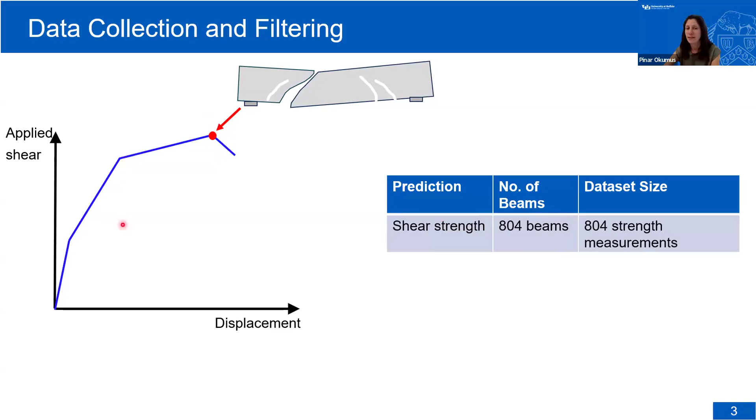At that point, your cracks are already very large. We're not worried about cracking. But you'll see that we use this prediction to benchmark our applied shear predictions and the total response.

The second algorithm we developed is for applied shear. Applied shear is all these points that correspond to measured crack widths. And if you look at the literature, only actually out of the 804, only 79 beams reported crack widths and shear measurements. But luckily for each beam, you have multiple crack points like this, and multiple load measurements. So we have 409 crack width versus shear measurements for applied shear that we can train, and that's the sufficient number actually for the algorithm that we picked.

We take this applied shear and normalize it by the shear strength. That's why we need this shear strength parameter, so that it gives you a better idea of the bridge condition, because saying your bridge was loaded to 100 kips may not be meaningful, but if you say your bridge was loaded to 80% of its capacity when you saw that crack, it is meaningful information that you could use to say, okay, that bridge is going to be prioritized before another bridge that may have been loaded to 30% of its capacity.

And then finally, the last algorithm predicts stiffness. For stiffness, there's actually even fewer beams, so only 37 beams in the literature, and 254 crack width versus stiffness measurements, because again, for each beam you have multiple crack measurements. So this 254 is on the lower end of data size for machine learning, but we worked with what we have. And stiffness, similar to applied shear, we normalize it by the initial stiffness, so this portion of that load displacement curve.

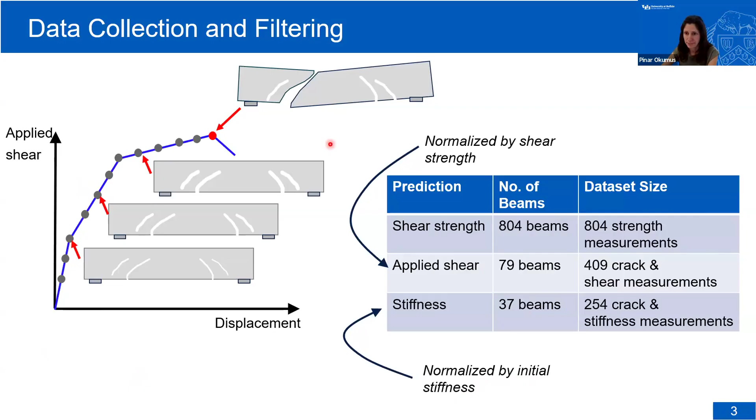So I'm going to jump into the results directly for this part. These are our machine learning predictions. We're using something called Gaussian process regression. These plots you'll see a lot in this presentation. Vertical axis is the test results, horizontal axis is machine learning predictions. And if you see any dots on this red 45-degree line, that means it's a perfect prediction, we're spot on. As you can see, our machine learning does a pretty good job predicting the strength, and the large coefficient of variation comes from these outliers. The other advantage of the method that we picked is that it can also give you a variance, which is an indicator of how certain the predictions are.

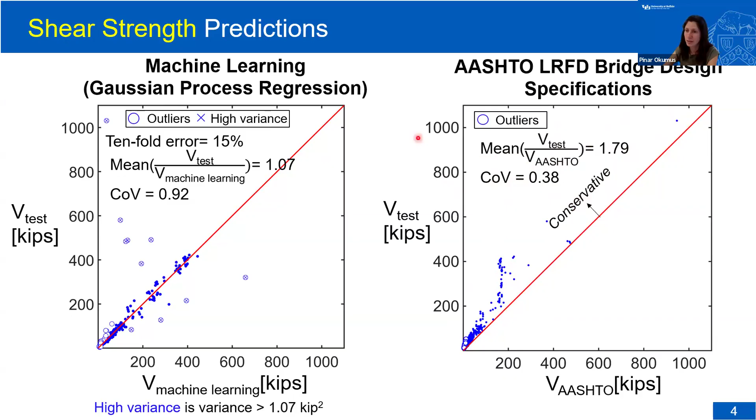If you wanted to compare that to how well design codes predict the capacity, this is one example. So this is AASHTO LRFD. You can see their mean of the ratio test divided by AASHTO is much larger. That doesn't necessarily mean that they're worse, they're trying to be conservative, that's the intent of the design codes. That's why all the dots are on the upper half of the plot. But it is an advantage to not have that conservatism in evaluation, because what's really valuable for new bridge design may not be needed for evaluation. And that's what our machine learning does.

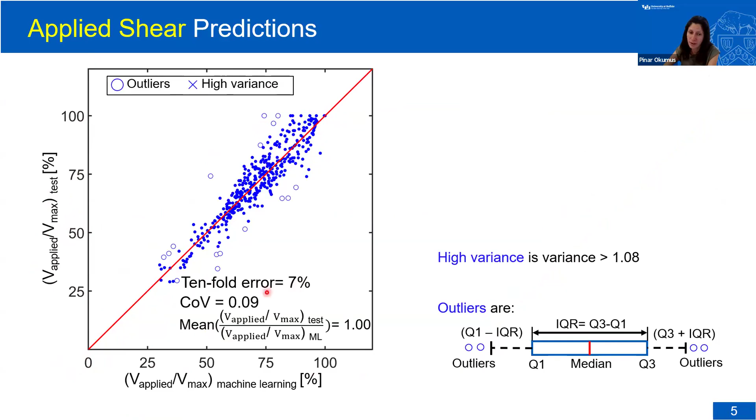For applied shear, again, same type of plot. So this is that applied shear corresponding to a crack, normalized by shear strength. Horizontal axis is machine learning. We have pretty good predictions, really good error, and a really nice coefficient of variation.

And then finally, from what you've seen before, we know that not all bridge engineers out there are going to want to run algorithms. So we developed this web interface where the bridge engineer or an inspector populates it with the bridge design features and the crack width, and then it tells them the percentage of the bridge capacity that the bridge experienced, so 67 here, and 51% of the stiffness the bridge experienced when there was that crack. And again, the variance is that indication for uncertainty.

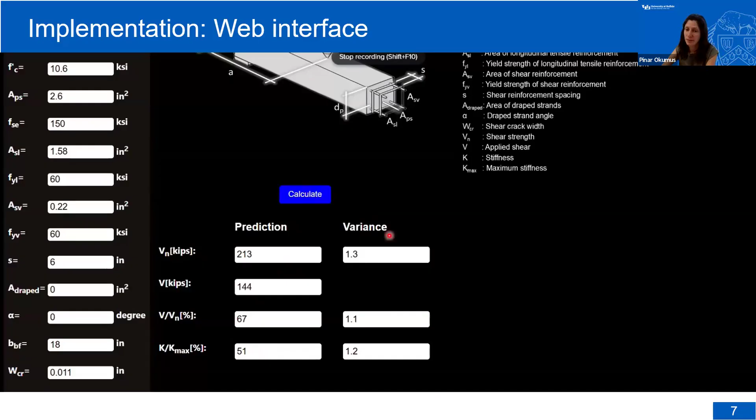All right, so the main part of this presentation is on the beam test that we recently conducted. And the reason why we wanted to test the beam was that we wanted to really understand cracked beam behavior.

If you look at the literature, we have hundreds of tests, but almost all of those tests are loading the beam monotonically under monotonically increased loading. Our test loaded the beam to cracking, unloaded, and then loaded it again. So we conducted cyclic loading testing.

So now we're saying, okay, if an overloaded vehicle passes through the bridge and it cracks, what will happen to that bridge when it's loaded again? We can understand that from our test.

That also gives us an ability to evaluate the capacity predictions of design codes and our algorithms compared to test data. It allows us to assess our applied shear and stiffness predictions, and you'll see that we use some of the new data to enhance some of our predictions.

But first, I'll start with just telling you about the test results and how the design codes and machine learning predicted the capacity.

So this was our beam specimen. We tested a 30-inch deep Pennsylvania standard section. If you're not familiar with it, that's similar to an AASHTO type I section beam.

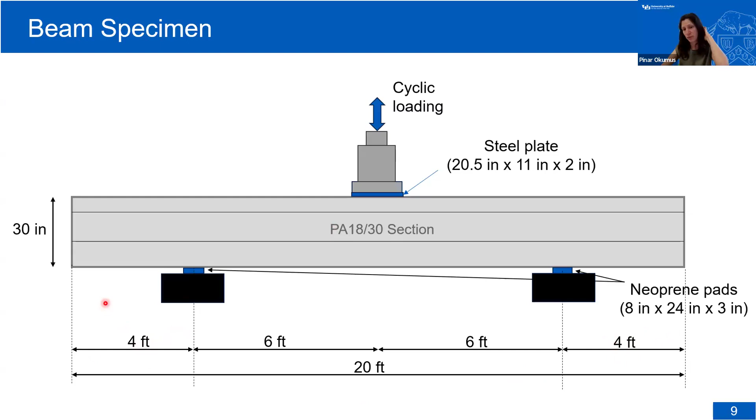It's 20 foot long. We have a 4 foot overhang on each side because we did not want the transfer length to interfere with our results. And like I said, we're doing cyclic loading.

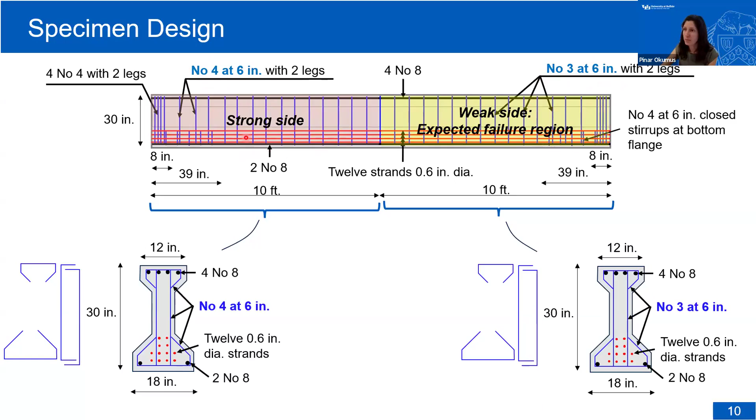On the left-hand side of the beam, we have number 4 bars at 6 inches. We call it the strong side. We know we're not going to be able to fail the beam on the strong side, so we won't be able to get the capacity, but that doesn't mean we cannot collect crack width versus applied load data. So that's what we're getting from the other side.

Our loading protocol, like I said, was cyclic. The other thing I want to make clear here is this is the beam displacement versus time, our loading protocol. So we load, unload, load, unload, load, unload.

One very important thing we can get from this type of testing is that we collect data when we load the beam, and that's your transient crack width. We measure the transient crack width when there's a load on the beam, because this is what all the literature is reporting, since they're running monotonically increasing loading tests. So all the crack data that we have in the literature is really for transient cracking.

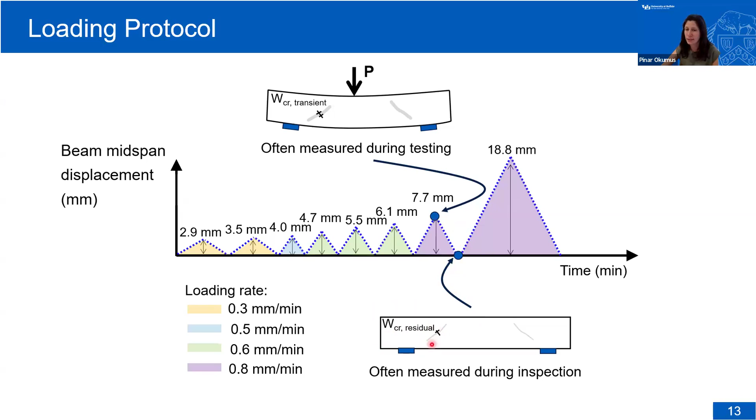But nobody reports residual crack width. Residual is after you remove the load, what's that remaining crack? And it's important because that is what's measured during inspection. Again, there's no data that links the two crack widths together. So we wanted to get a sense of that.

Okay, so before we did any testing, we predicted the capacity using various methods. Our machine learning told us that the beam was going to fail at 550 kips, and all the design codes were much, much lower. You can see AASHTO is actually almost half of it.

We also ran finite element analysis on this one, and that's this result. So finite element analysis was in between the machine learning prediction and the AASHTO prediction.

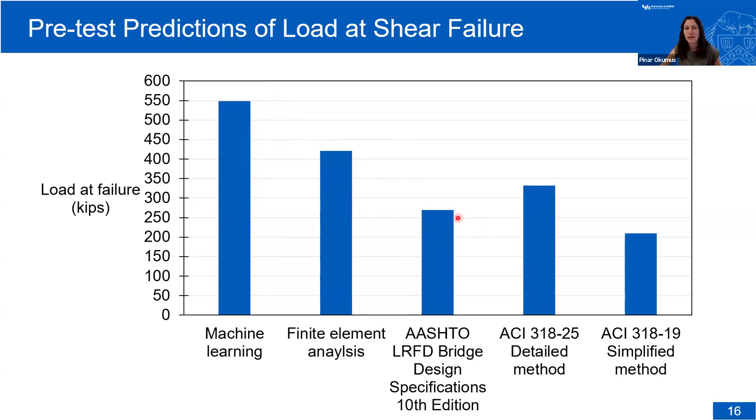And then we tested. So here's our test load and displacement response. We have the actuator force versus displacement. You can see we loaded the first cycle. At the end of the first cycle, we actually did crack the beam already in flexure and shear. We unload, and every cycle that follows, you can see that the initial stiffness is smaller.

And then we had stirrups yielding, and at 450 kips we take it as our failure load. We start seeing the plateau. We started seeing and hearing cracks falling, and we did not want things to get unstable any further, so we stopped the test here. It may have gone maybe another 20 kips or so higher, but we take this as our failure load.

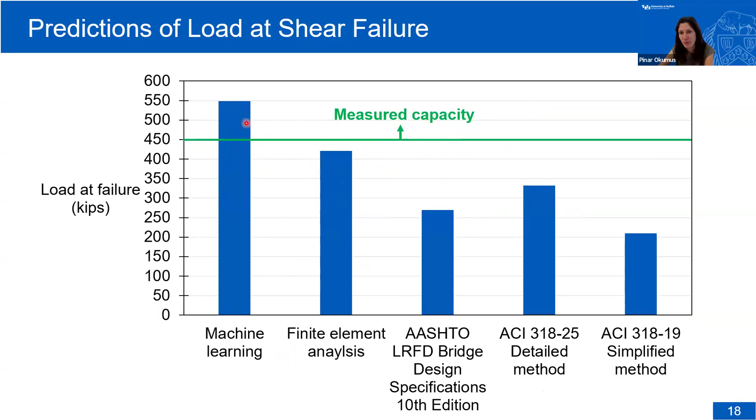So if I plot that measured capacity on my plot, this is how it compares to machine learning, finite element analysis, and the code predictions. Here the finite element analysis is the winner, and machine learning is the runner-up. Again, measured capacity is here, but it could have been a little bit higher.

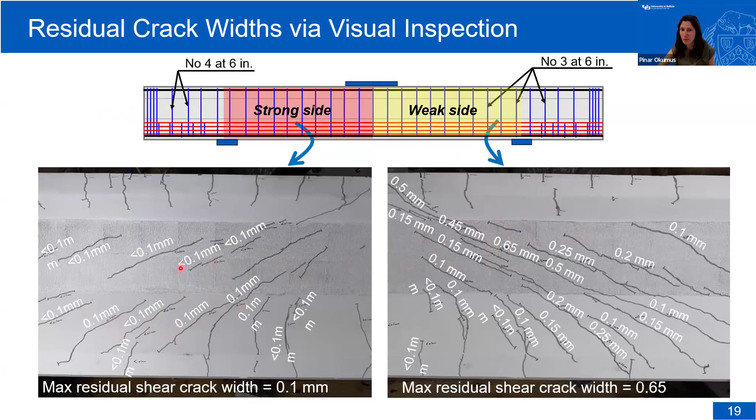These were the crack widths that we collected. So we did see those shear cracks. These are the residual crack widths, that's why they're small. But we collected that data from the weak side and the strong side. You could see that doubling the reinforcement really does help with the crack width, so much smaller cracking on the strong side of the beam.

This plot is showing the same thing, so residual and transient crack widths this time, but we're plotting them together. These hollow markers on the bottom are the residual crack widths from both sides, so it's nice and small. This is what you saw in that picture. And then these are the transient ones that we measured through testing.

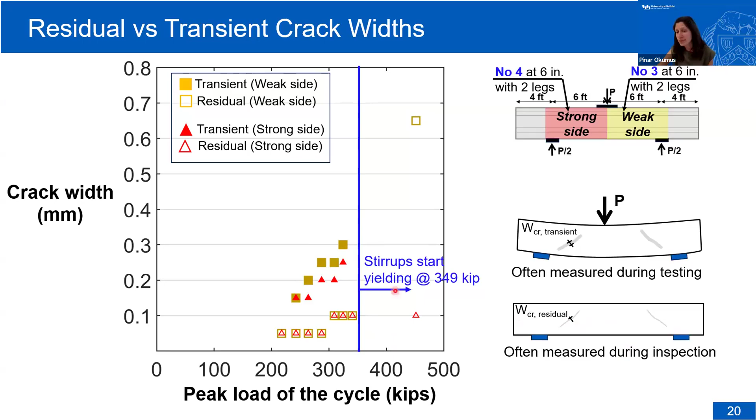So one very interesting conclusion we make from here is that transient crack widths actually can be 2 to 5 times as high as residual cracks. And that's important again because residual cracks are what we're measuring during inspection. And then once the stirrups yield, the residual crack widths get much larger as well.

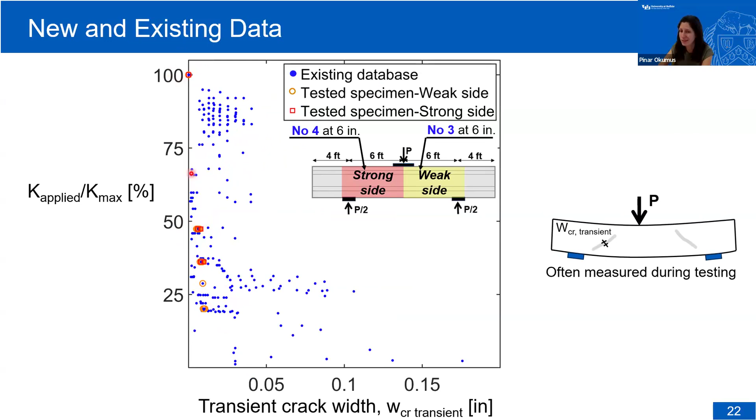And then this is for the stiffness plot. So we added, again, many data points to that stiffness plot. You don't see as many here because a lot of the dots are on top of each other, because they have the same stiffness for varying crack widths.

Okay, so that's what we learned from the cracked beam test. I think the most important thing we learned was that even though your beam is cracked, you may see cracks in the field, but your capacity will still be many times above, a couple of times above the design code predictions. So the second thing we did with our test data is that we tested our machine learning predictions for the applied shear and stiffness.

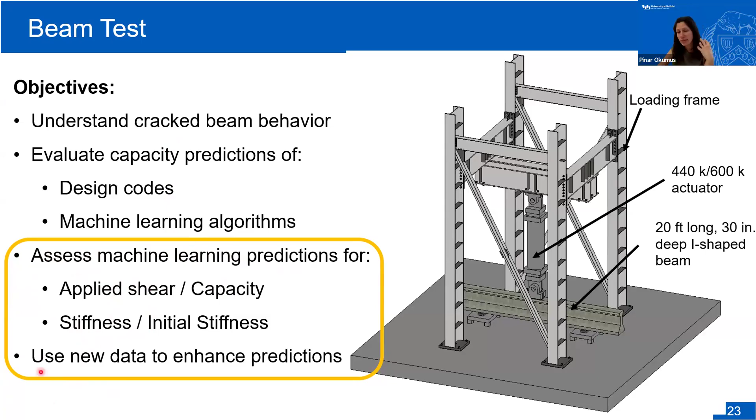And then we also used some of the new data to see if we could enhance our predictions. So as you remember, we had data from both sides of the beam, 2 sides, and we used them actually for 2 different purposes. The strong side data, we use it to update our machine learning algorithms.

So any data we collect from there is going to be added to the database. And the data we get from the weak side, we never show that to the algorithm, so that's always unseen by the algorithm because we're using it to test the machine learning algorithms to assess the accuracy. So the two sides are similar, similar dimensions, but very different reinforcing ratios.

One issue we have with this is that the shear strength, we didn't test this, the strong side, so we don't know the shear strength of the strong side. So we complemented the test data with data we get from finite element analysis. We calibrated that finite element analysis first using the weak side data, and then predicted the strong side, added it to our database.

This slide is showing that calibration. The green line is a load displacement curve, the test backbone curve. The black line is our calibrated finite element analysis.

On the right side, you see what is calibrated. So really the most significant calibration took place at the modulus of elasticity of concrete. We had to change that. But given how uncertain that parameter is inherently, we think it's reasonable.

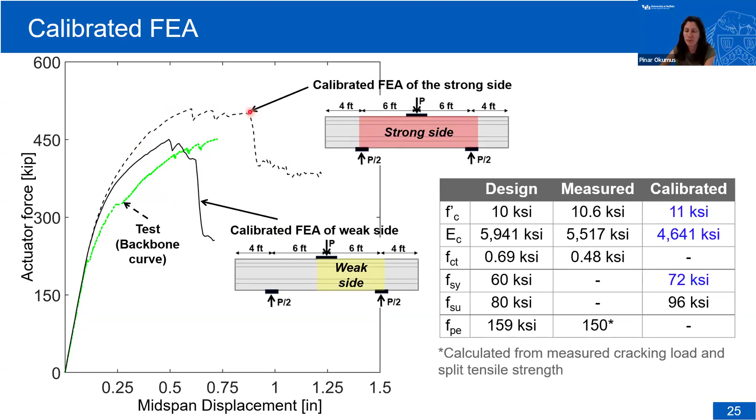We did the same thing for our applied shear predictions. Before retraining, before the algorithm sees similar data, we had 23% error. The comparison looked like this. After we showed the algorithm something similar, it did a much better job matching the test data.

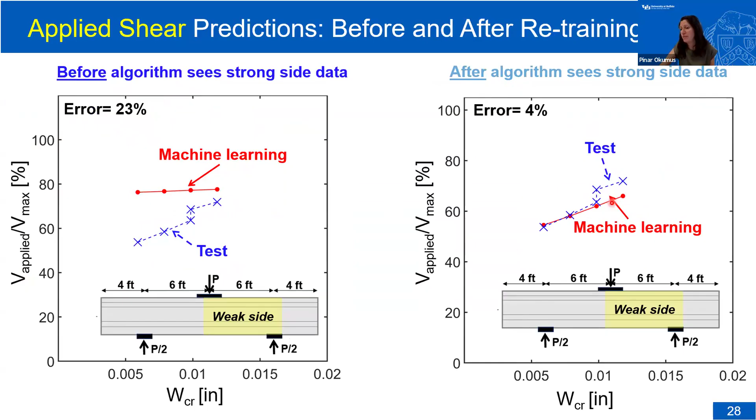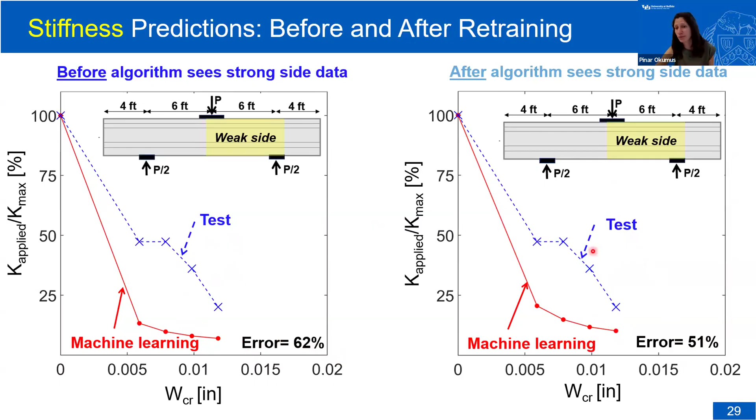Finally, this is our stiffness, a different type of situation. We had a large error to begin with, before we show the strong side data or similar data. After it saw something similar, the error was smaller, but still quite large. That goes back to the limited number of data points we have for stiffness. We filtered the data, refiltered, but at the end we concluded that we simply need more data in the literature to do better in this.

All right, the final thing I'm going to show is, what you've just seen is for that single beam. So how does the algorithm do in general for their predictions before we added new data and after we added new data?

Back to my 45-degree plots again, test versus machine learning. This tenfold error we're using to indicate the performance of the algorithm is commonly used in machine learning. It means we are randomly selecting samples from the dataset to test our algorithm, doing it 10 times, and averaging the error to tell you what that is.

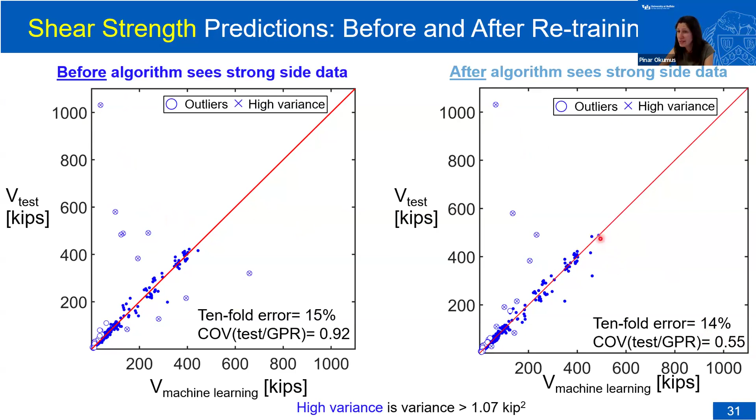Before the algorithm sees the new data is what we have on the left-hand side. You've seen that exact plot before. After the algorithm sees the strong side data, our error doesn't decrease much, 15 to 14% is not much, but our coefficient of variation actually decreases quite a bit. We think that's because the issue this algorithm has is really with really large size beams, so by adding even one larger size beam it helps with the coefficient of variation.

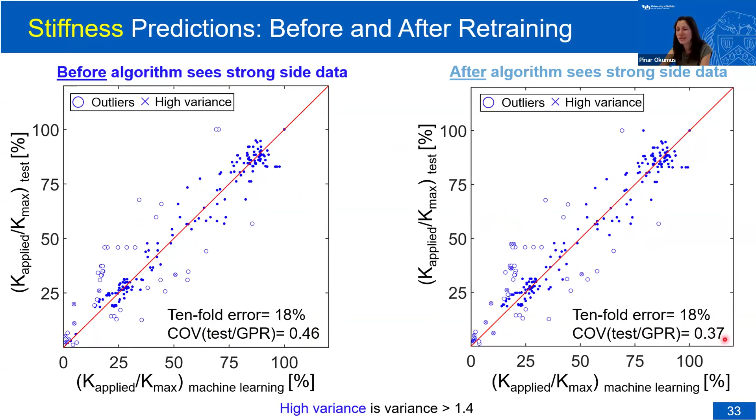And finally, our stiffness predictions again. We had that large scatter. We still have that large scatter, but our coefficient of variation is a little bit better. So we're happy with that outcome.

So the conclusions from our entire study: first I'll make the conclusions on what we learned from testing. We learned that even though your beam may be cracked in the field, the design codes will likely still give you conservative predictions for the capacity. For example, AASHTO: what we measured was 1.7 times what AASHTO predicted as the capacity, even when we cracked the beam first and then loaded it to its capacity.

We observed that the transient crack widths, the widths under the loading, are 2.5 to 5 times the residual crack widths. That's significant because bridge inspectors will be measuring residual crack widths, versus all the test data in the literature which are on transient crack widths. We didn't really make this a recommendation because we only have one beam with this data, but it may not be such a bad idea to convert the residual to transient before you input that crack width into our user interface, maybe multiply it by 2 based on some judgment.

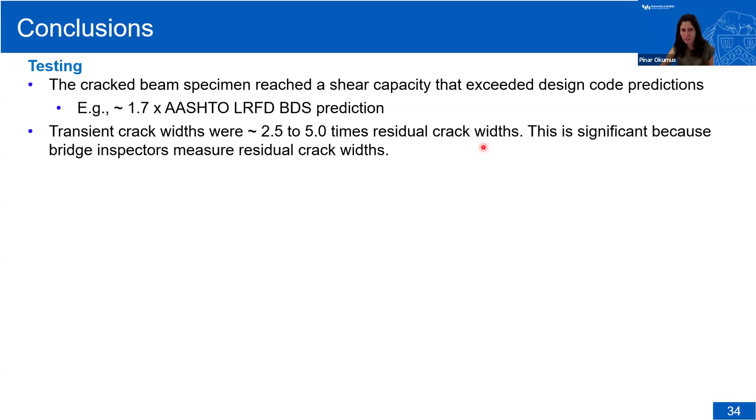And that shows that the variety of data you could add to the dataset could make a difference, because we have somewhat different data than the majority of the data in the literature.

The final conclusion is on that one tested beam. Like I said, we're retraining the algorithm using the strong side data and testing it using the weak side data. For that one beam, some of our predictions did improve when the algorithm saw similar data. For example, shear strength error decreased from 22% to 9%. We also made our applied shear predictions better, but it didn't really help the stiffness predictions much, and again stiffness has that issue of lack of data.

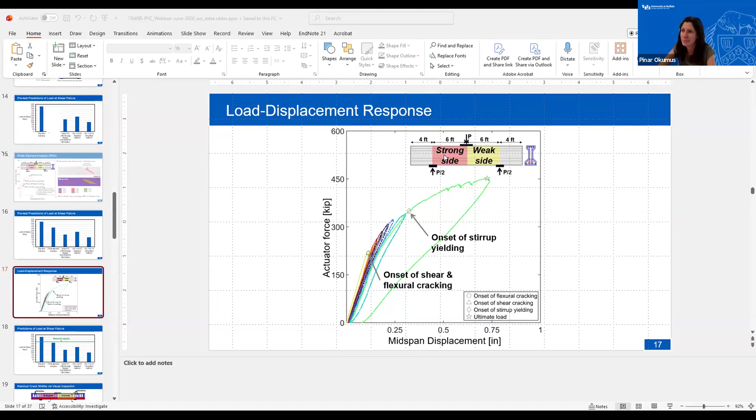Okay, one option. Thank you, Pinar, so much. Well, thanks, Pinar, again for the great presentation. I appreciate that. Let's now move to our next speaker.

This project, as I said earlier at the beginning of the webinar, I'm the PI on this project. As you know, TRANS-IPIC is one of the directions of research we focus on, including new materials and shape memory alloys. For those who have been following us, or members of our team, our center really focuses on shape memory alloys and their applications.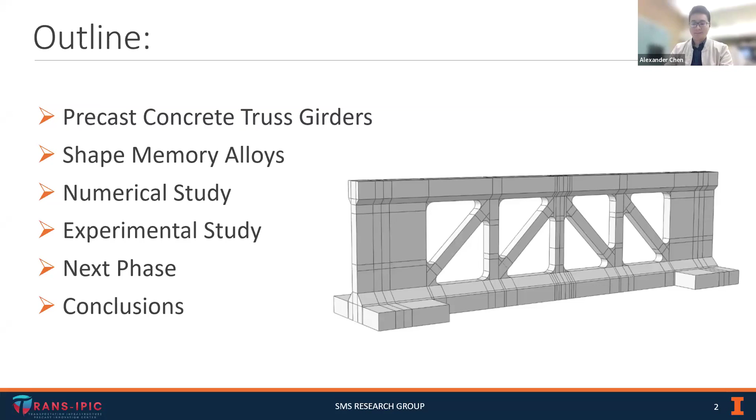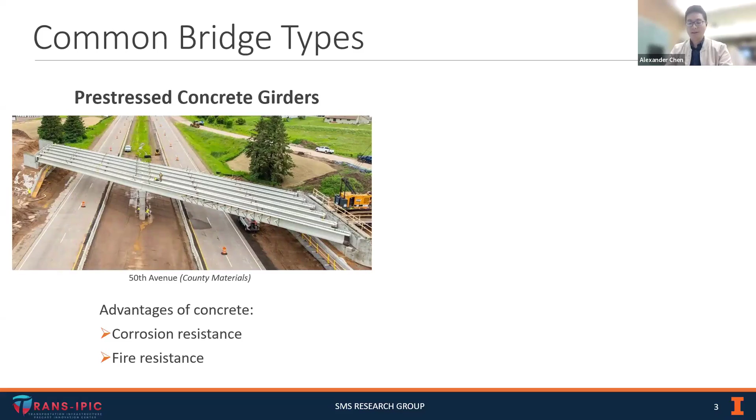To begin, I'd like to ask a simple question: what are the most common bridge types? They likely fall into two main categories. The first is a concrete bridge supported with pre-stressed concrete girders, popular because of concrete's material advantages like good corrosion resistance and fire resistance. The other type is a steel truss bridge, which is very optimized in geometry, allowing reduced cost and reduced weight.

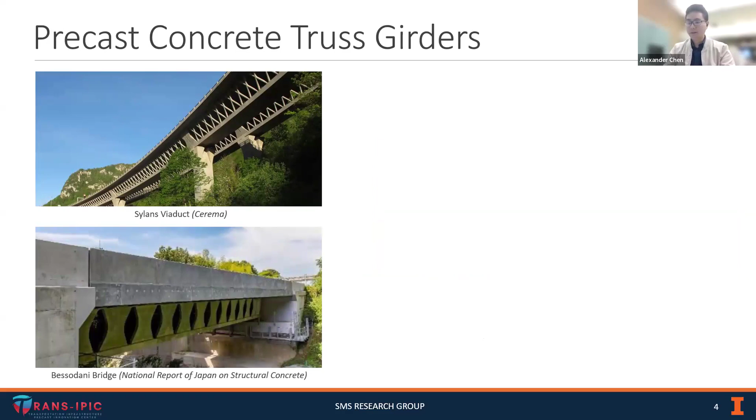Now, what if we try to take the best of both worlds and combine this into a single bridge? You end up with a precast concrete truss girder. Here's an example in France, and here's one in Japan. They look different, but follow the same design philosophy: changing the web of a concrete girder into a truss.

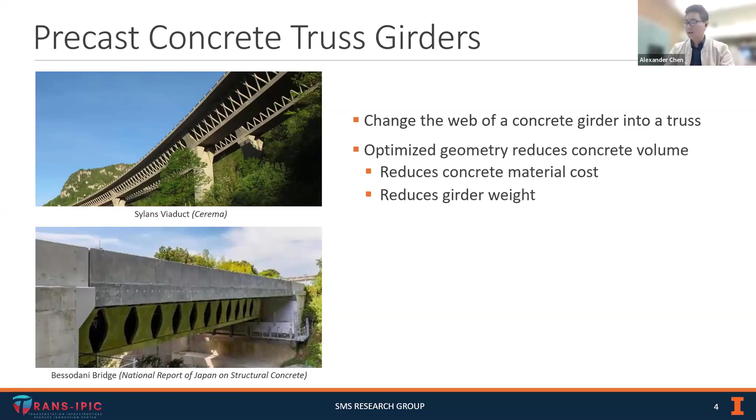This optimized geometry reduces the concrete volume, leading to direct savings in material cost. It also reduces the weight of the girder. Reducing girder weight results in further cost reductions, because less weight means less material to transport, so delivery trucks use less fuel. Also, reduced girder weight means less demand on the substructures, allowing for smaller, more optimized designs. In other words, even though we're changing just one element of the bridge, we're improving the bridge as a whole.

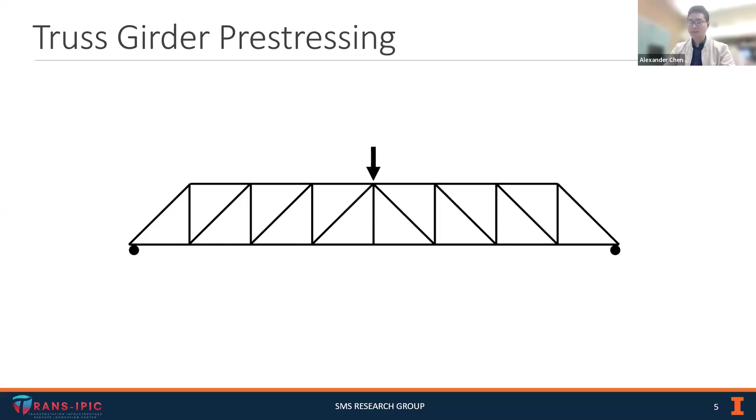Now I want to dive into how to design and fabricate one of these truss girders. Here I've drawn a picture of an idealized truss. If we apply an external load, the members will be either in tension or compression. Concrete is great in compression but very weak in tension, so it's important to pre-stress the tensile members of the truss to help with crack control under service level loads.

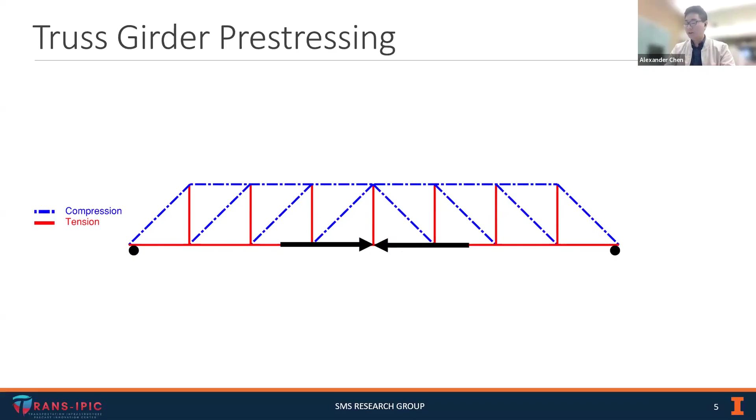The act of pre-stressing this bottom chord can use a conventional pre-stressing method because the geometry isn't too difficult—it's similar to what's used for a conventional pre-stressed precast concrete girder. We can place it in a casting bed and use hydraulic jacks at the ends to tension high-strength steel strands.

Now, these verticals that are also in tension are trickier to pre-stress with conventional equipment, because you not only have multiple members to pre-stress simultaneously, but also need clearance at the top and bottom of the beam for the equipment. You also need to consider that these strands in the verticals will intersect with the strands in the bottom chord at the joints.

So we're proposing a new form of pre-stressing called shape memory alloy thermal pre-stressing. This resolves the issue by eliminating the need for hydraulic jacking equipment and external anchorage. It also solves the problem of the intersection of the vertical pre-stressing steel with the bottom chord's pre-stressing steel, and ultimately provides more localized pre-stressing.

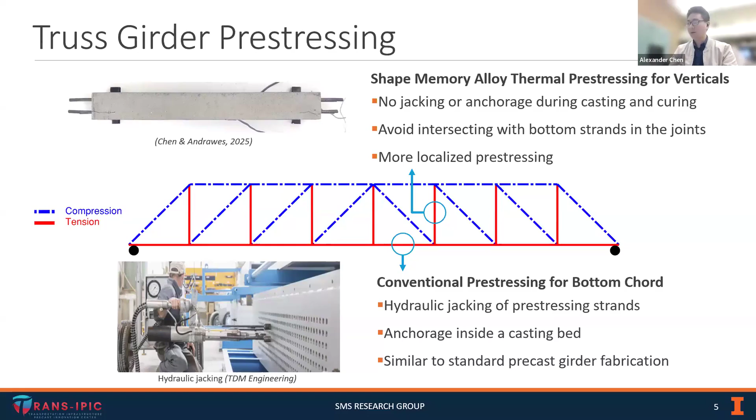Before I can explain how shape memory alloy pre-stressing works, I'll provide a quick background on what exactly is a shape memory alloy.

Shape memory alloys are a class of alloys that possess different crystalline phases, and by switching between these phases, it creates a shape memory effect. To help illustrate this, let's imagine we have this bar of SMA here.

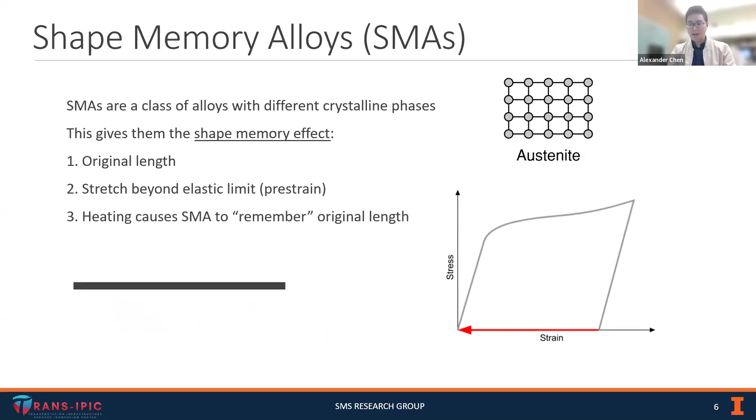We can stretch this out beyond its elastic limit to permanently deform it, so it goes from martensite to a deformed martensite phase. Now at this point, if we apply heat to this bar, the SMA will change phases to austenite and remember its original length.

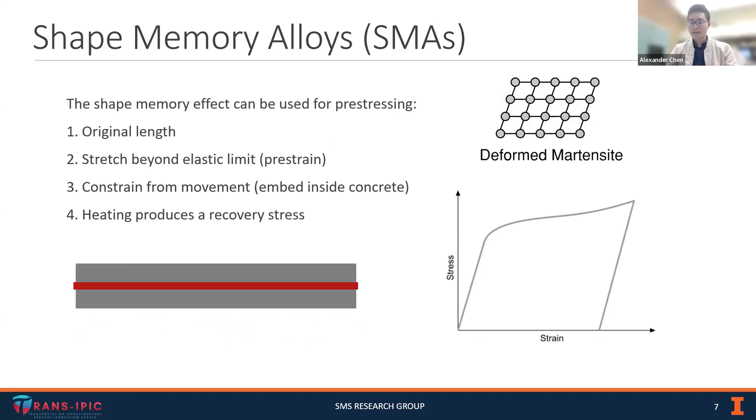Now if we want to use this principle for pre-stressing concrete, we start with the same steps. We take a bar of SMA, pre-strain it. At this stage, we add the additional step of placing it inside of concrete, which constrains it from movement. Applying heat at this stage causes the phase transformation, and the SMA imparts a recovery stress onto the concrete, and this recovery stress is what pre-stresses the concrete.

The first step our research group took in exploring this concept was a numerical study, done by a former student, Professor Andrawes, whose name was Min-Soo Sung. He analyzed a bridge supported by 5 of these concrete truss girders.

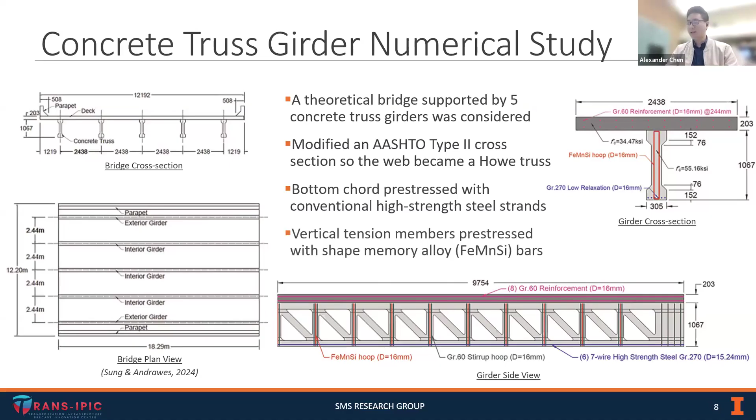The girder geometry was designed by taking an AASHTO Type 2 cross-section and converting the web into a truss. The pre-stressing methodology is similar to what I described earlier, where the bottom chord uses conventional high-strength steel strands, and the verticals use the shape memory alloys for pre-stressing.

The performance of this girder was compared against a standard AASHTO Type 2, and what we found was that the concrete truss can reduce the volume of concrete by 38% while still meeting the limits to satisfy a strength 1 limit state. So these are very promising results, and our next step was to validate it experimentally.

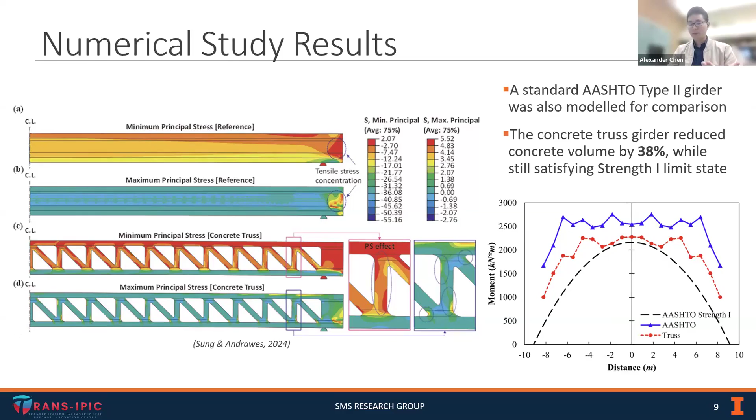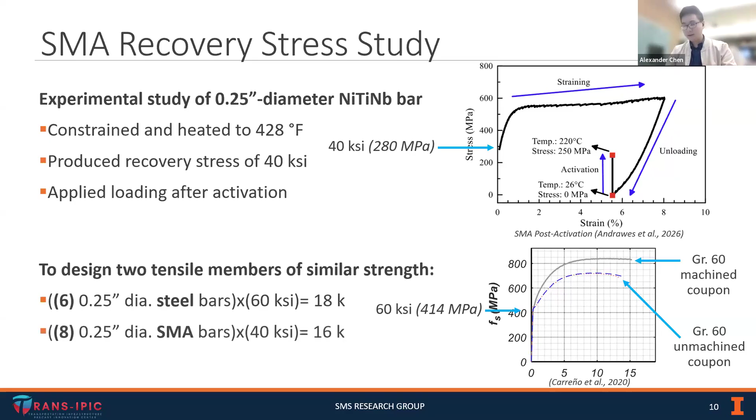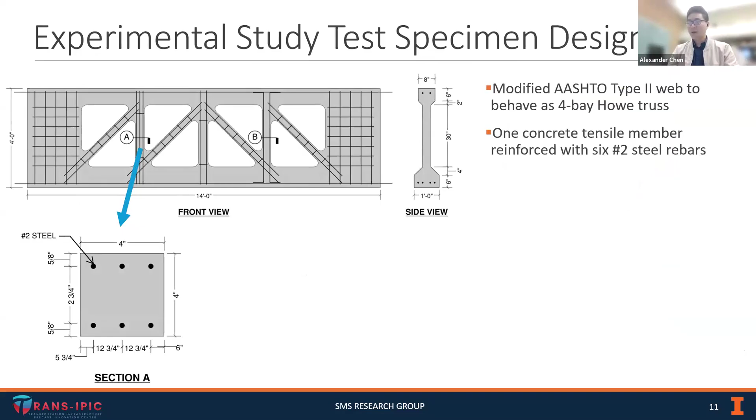To design the truss, we followed the same approach as mentioned before, where we take an AASHTO Type 2 and modify its web into a truss. We used the 6 1/4-inch diameter steel bars in one of these tensile members, and for the other one, we used 8 1/4-inch diameter SMA bars.

Now you'll notice that these 8 bars aren't distributed uniformly. Instead, we have them grouped into pairs in the corners of this member, and that was done so that when we heat these SMA bars to activate them and trigger the shape memory effect, we can heat pairs of SMA bars at the same time as opposed to one by one, which speeds up the process. I'll talk a bit more about the heating procedure in a later slide.

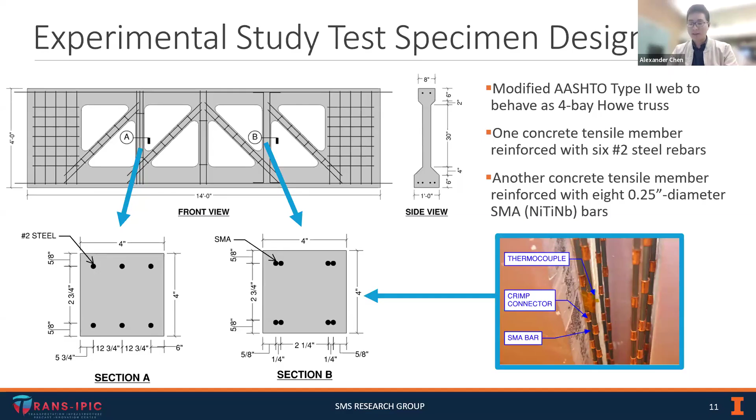Here's an image of what these SMA bars look like before they're placed inside concrete. You'll notice they have a smooth surface, so what we did was we added these copper crimp connectors along the length of the SMA bars, and that's going to help it engage and bond with the concrete. We also have a thermocouple attached, and we'll be using that to monitor the temperature of the SMA when we heat it up.

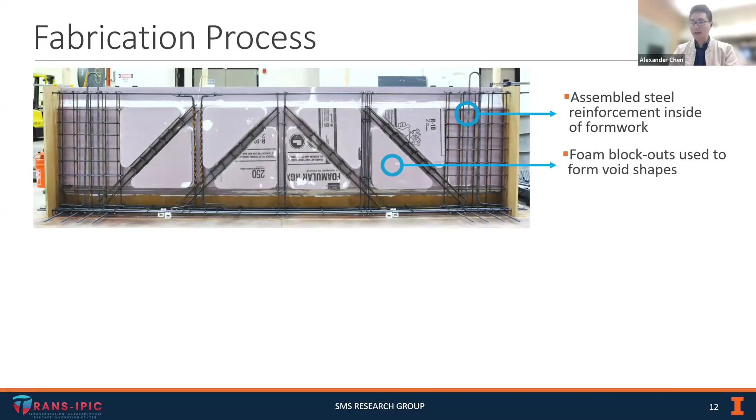Now I want to talk a bit about the fabrication process. The first step was to assemble the reinforcement inside of the formwork, and this was done by tying all the bars together with rebar ties and supporting them on top of rebar chairs. We used 8 of these triangular foam blockouts to form the shape of the voids in the truss.

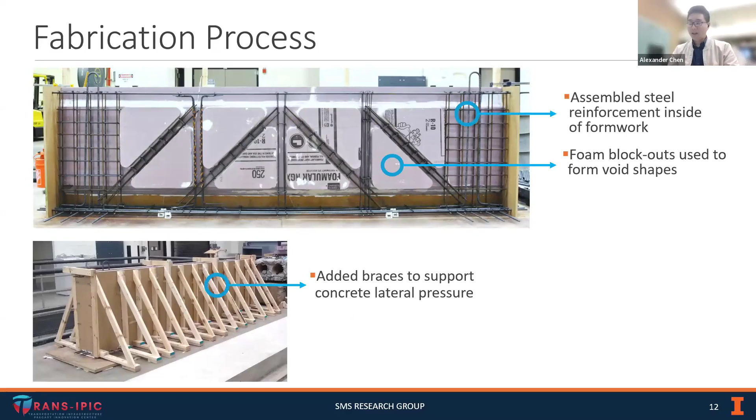Specifically, we began pouring concrete from the center of the specimen, and our goal was to have the concrete flow from the center outwards to the ends and completely fill the bottom chord before we tried pouring concrete at any other location. By doing so, we can ensure that we aren't trapping any air pockets underneath those foam blockouts.

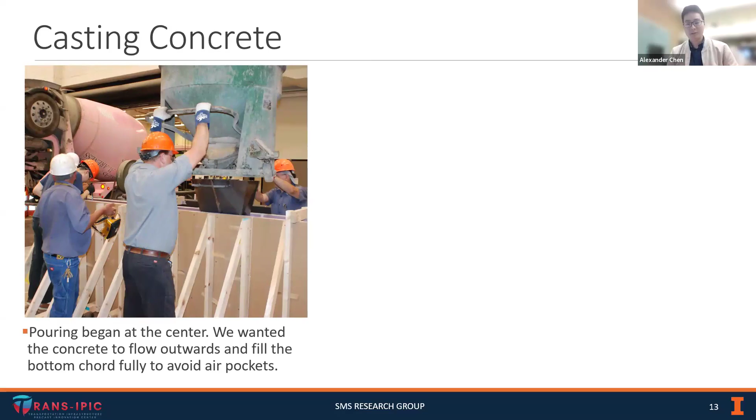So we kept filling, and then right around the halfway mark, the formwork actually flexed at one portion. You can see in this image, we had to go in with a couple extra clamps to provide additional support against that movement from the concrete pressure.

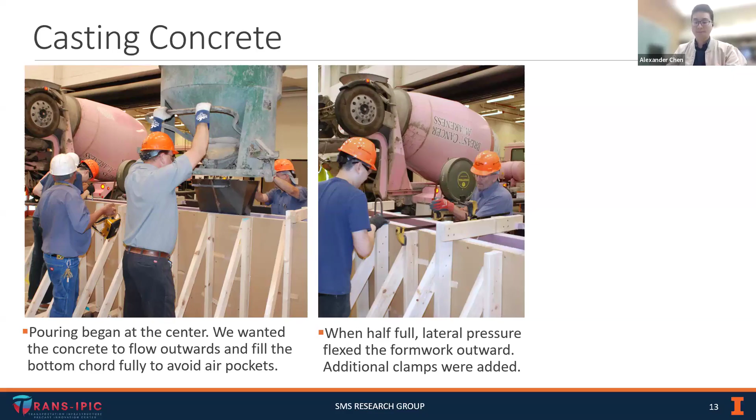Because of the rebar congestion, we weren't able to put the vibrator into the concrete to remove air bubbles. Instead, what we had to do was use the vibrators externally and vibrate the formwork.

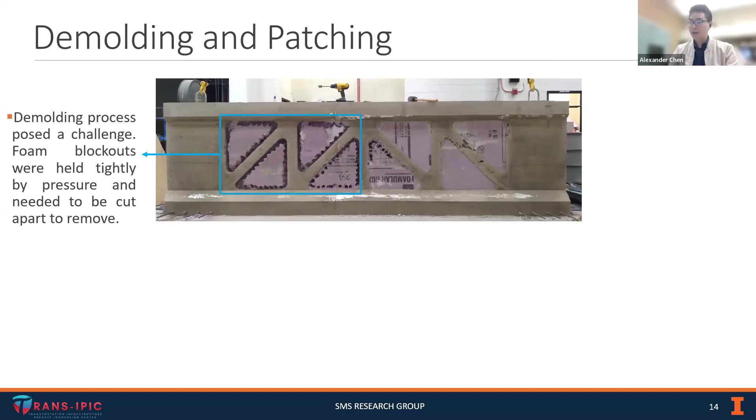Now, once the concrete hardened, we could begin demolding the specimen. This proved to have its own challenges because the foam was actually very, very tightly squeezed by the concrete. You can see in this image, in order to get the foam out, we had to chip it bit by bit away from the concrete.

On this side, you'll see that there are some voids in a diagonal member of the truss. This was the location in the previous slide where I mentioned how a portion of the formwork began to flex under the pressure of the concrete. That movement of the formwork sucked in a couple of air bubbles at that location. Fortunately, it was very easy for us to just patch this up once we fully demolded the specimen.

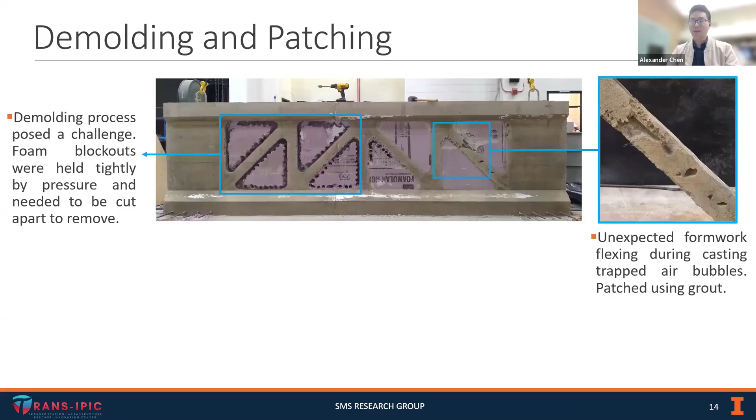You also notice that there are some bars protruding out of the specimen. We use this to later add on footings, and this is to help with the stability of the specimen.

Now, you might be wondering how exactly are we going to heat the SMA bars now that we've encased them fully inside of concrete? The answer is to use electromagnetic induction. This works on the principle of having a coil through which you run an alternating electrical current. This current, as it goes through the coil, generates a changing magnetic field, and this magnetic field passes directly through concrete without heating up the concrete, and only nearby metals will react to this magnetic field. So nearby metals like SMAs will be heated up without direct contact.

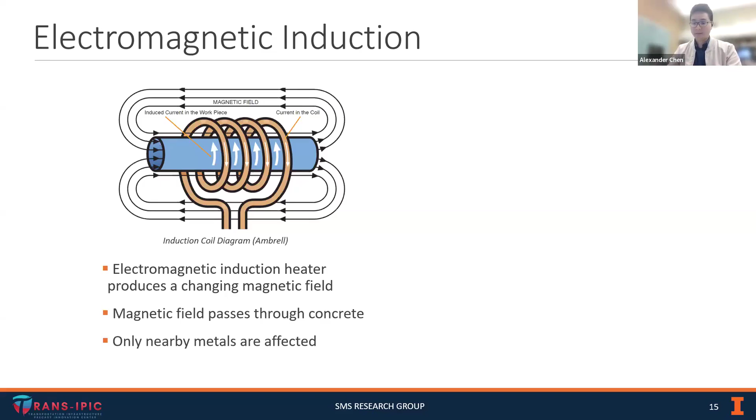Our research group has used this technique previously with great results, so we are excited to use it on the truss.

We also had strain gauges attached to the specimen, and by using these values, we can equate the amount of force being developed in the concrete to a pre-stressing force of 8 kips.

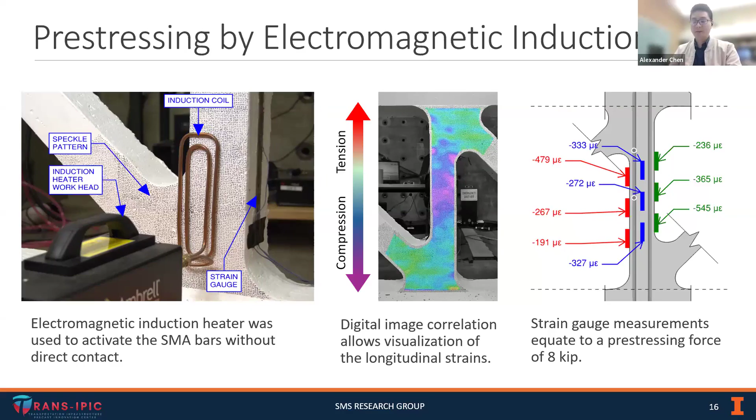So once we pre-stressed everything, we moved it into a 3-point flexural test setup.

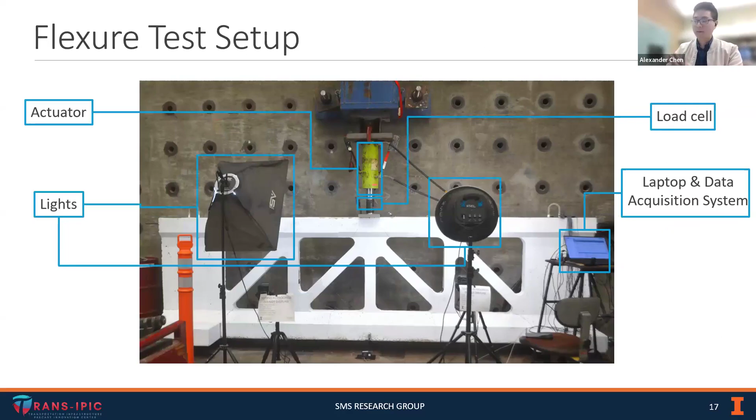We have an actuator at the top, a load cell between the actuator and the test specimen to measure the applied load, a laptop and a data acquisition system to record all the data. We have 2 lights, one for monitoring each specimen, as well as 2 cameras, one to monitor each vertical member of the test specimen. We also have an LVDT to measure the vertical displacements of the test specimen.

So in this current orientation, the steel member is on the left-hand side, and the member that has the SMA bars is on the right-hand side.

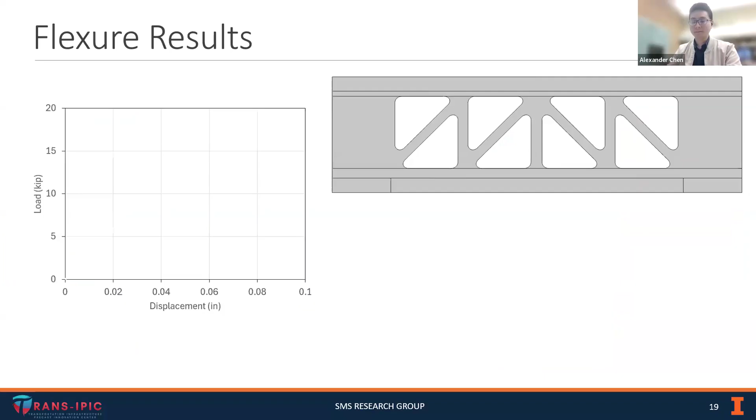So we began loading, and you'll notice a slight change in stiffness. That was just due to rotation and a little bit of settlement at the supports.

When we reached about 5 kips of applied load, using digital image correlation, we detected cracks in the upper joint on the member with steel reinforcement, indicated by DIC in red. At the same time, on the mirror image SMA side, we don't detect any cracks.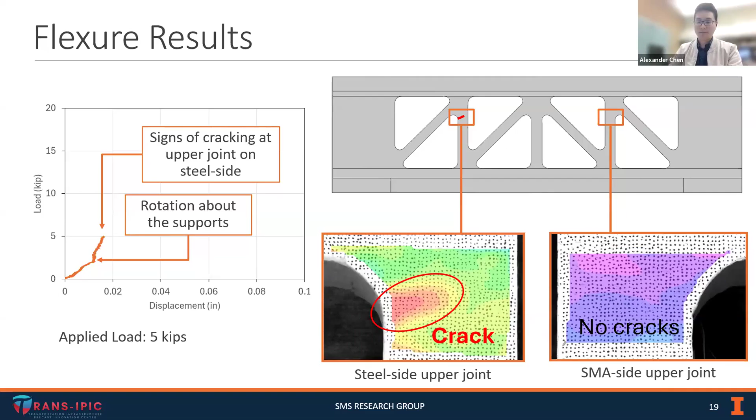We then kept loading, and when we reached an applied load of 10 kips, we saw signs of cracking, this time at the lower joints on the steel side. Similarly, there were no signs of cracks on the lower joints of the SMA side.

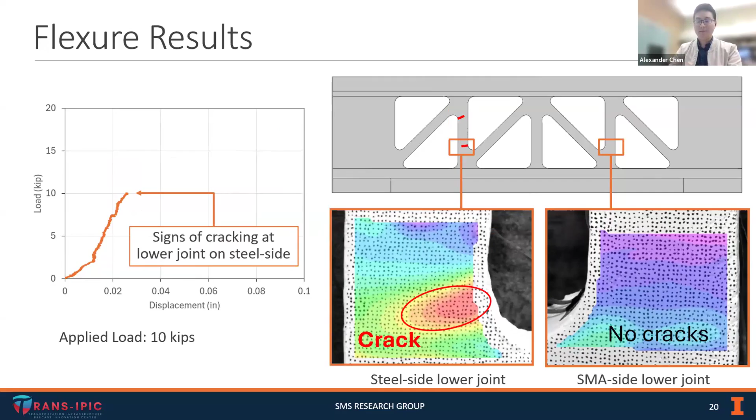We then continued loading, and when we reached around 12.5 kips, there's a sharp decline in stiffness, because the bottom chord had cracked at this location.

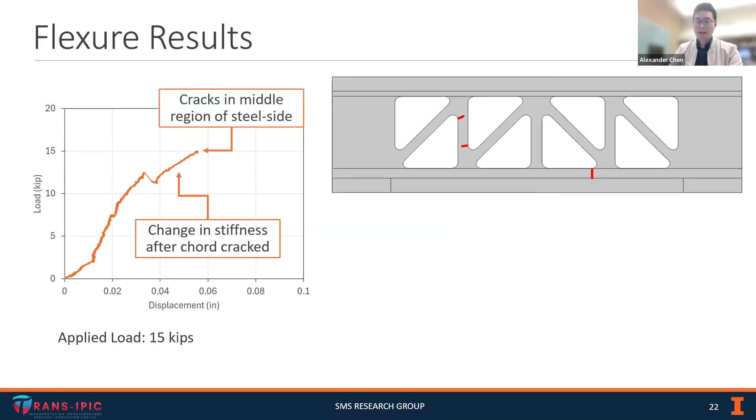We continue loading after this point. You'll notice the stiffness is a bit different now that the bottom chord has cracked. When we reached an applied load of 15 kips, we detected signs of cracking, this time two horizontal cracks at the middle region of the concrete tensile member reinforced with steel. Meanwhile, there are no cracks detected at that middle region on the side pre-stressed with SMAs.

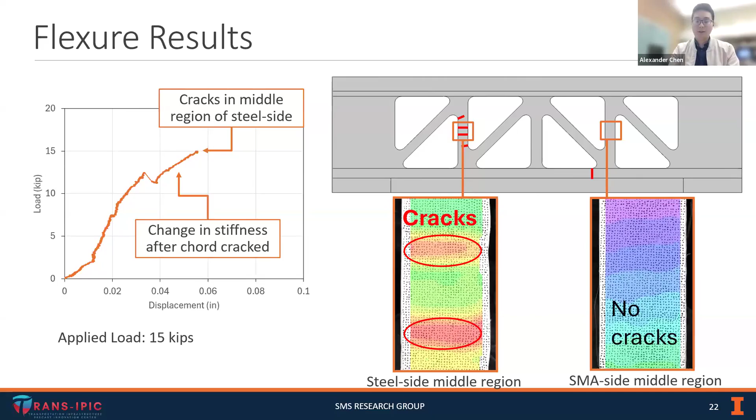So we were able to conclude that the SMA pre-stressing was effective at increasing the crack resistance of the concrete tensile member.

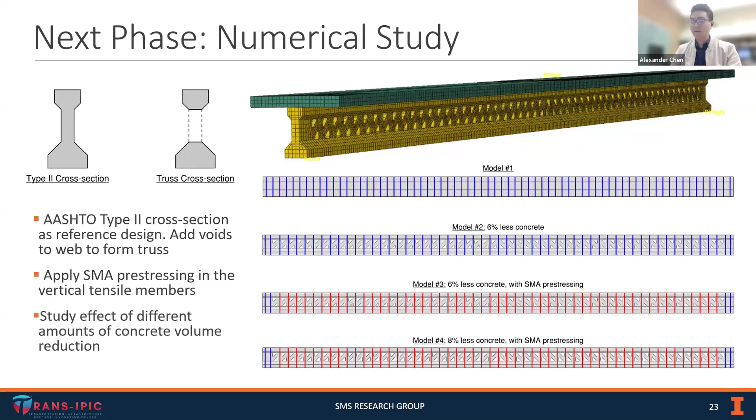Now, for our next phase, we're going to conduct another numerical study. Similar to before, we'll take an AASHTO type 2 cross-section and convert the web into a truss, using SMA pre-stressing in the vertical members. But what we'll do differently is explore the effect of removing different volumes of concrete.

Another thing we're doing in the next phase is using 3D concrete printers to produce these trusses. You might remember there are challenges with conventional formwork: you have to fabricate the truss, fabricate the formwork, which uses material and time. These members are slender, so there's a lot of reinforcement congestion, and you have to demold the specimen, which is difficult. You also can't use vibrators inside the concrete, so any trapped air is just there until you demold.

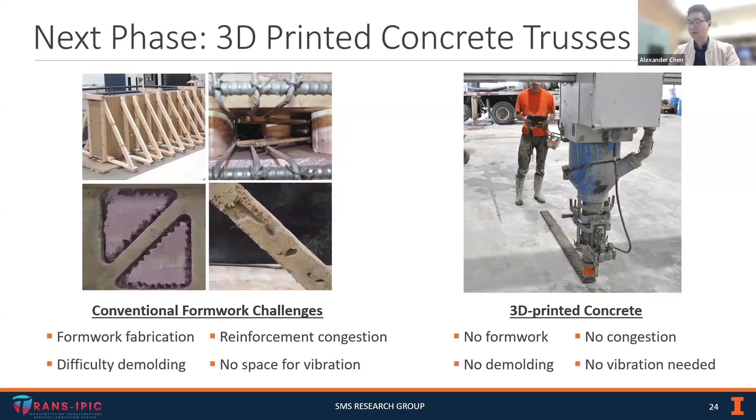If we were to use a 3D concrete printer instead, we can eliminate all of these challenges. There's no need for formwork, solving the problem of fabricating and demolding it. You'll see later how the way we integrate reinforcement eliminates rebar congestion. And since it's printed concrete extruded from a nozzle, there's no need to vibrate it.

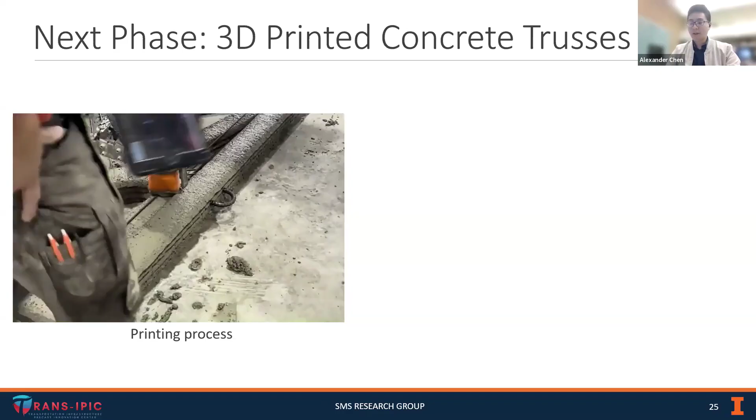A computer-controlled nozzle extrudes concrete in the shape of the truss.

To add reinforcement, we simply lay the bars in between the printed layers. This eliminates the need for tying rebars together or using rebar chairs, which solves the issue of rebar congestion as well. Once it cures, there's no demolding process, and it's ready to be delivered as is.

So we're very excited to test this and share the results of it in the near future.

In conclusion, the truss geometry uses material more efficiently, and by coupling this with SMA pre-stressing, we can reduce the concrete volume by up to 38%.

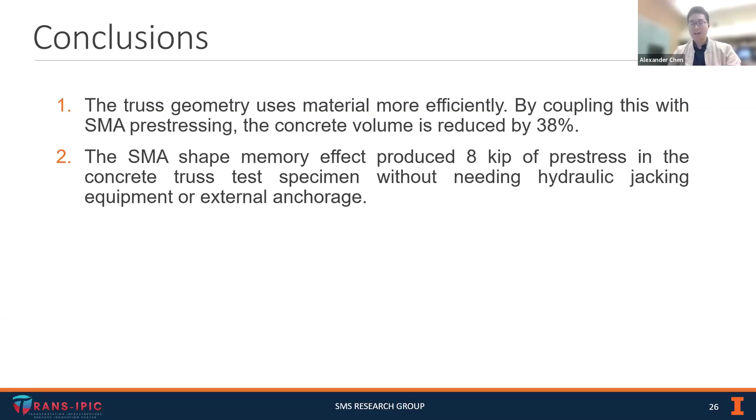Also, the SMA shape memory effect produced 8 kips of pre-stress in the concrete truss test specimen without needing hydraulic jacking equipment or external anchorage.

The DIC and strain gauge results show that the truss tensile specimen with SMA pre-stressing had greater crack resistance than the truss tensile member using just conventional steel reinforcement.

And lastly, by using 3D concrete printers, we can greatly speed up the fabrication process of these concrete trusses.

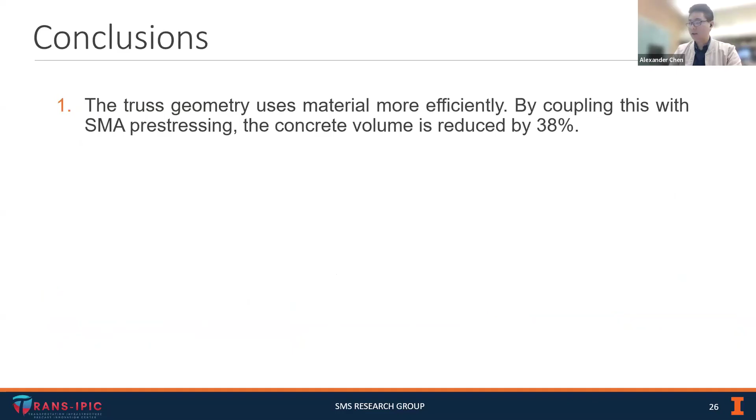Definitely the nodes of the truss are critical, I agree with that. The way we designed it for the precast version, let me go back to this picture. We approached it so that we wanted the nodes to be fully within the web, between the top and bottom chord, so we're not interrupting the continuity of that chord. We also tried to address stress concentrations by rounding out the edges of these joints. But definitely these joints in particular are something we can look into and study in greater detail.

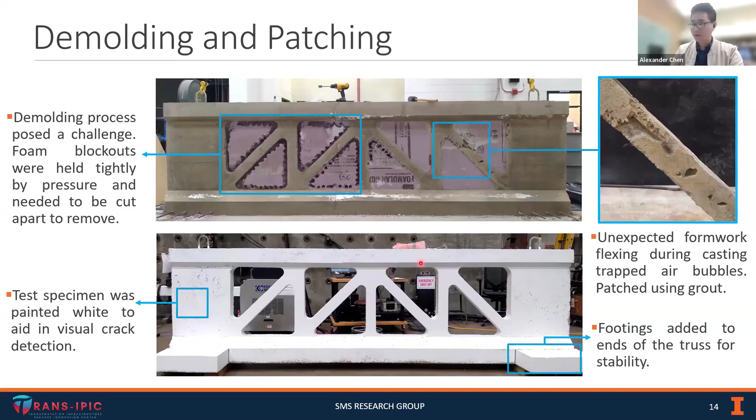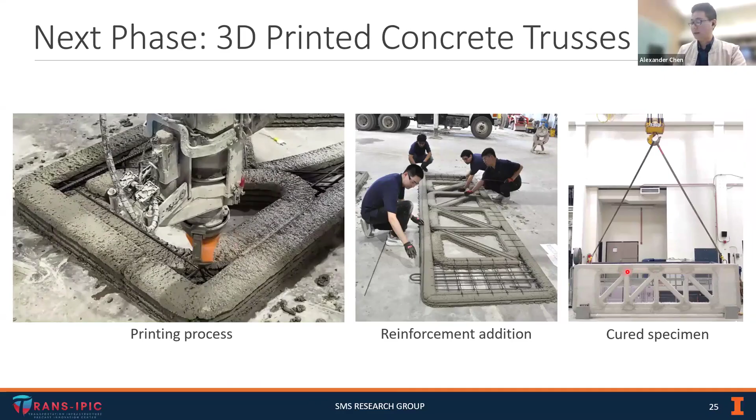The second part of the question was about the 3D printed concrete version. The question was about the patches at the 3D concrete printed version. I want to clarify that the patches there were not because there's an error in the printing. What we had to do, adapting the geometry of the truss to this printer, which was really designed for printing buildings, was to draw the path of the printer in a way that it did not intersect.

We rearranged the printer lines to make it print in the most optimal manner possible. But a consequence of doing it that way is that at all the joints, these printed lines don't perfectly mesh together. So on the left-hand side, there are some gaps where we had to patch it with concrete. This patching was done almost immediately after the concrete was printed, adding more concrete to fill in those gaps. So it's not an error like before, where we had air bubbles we had to patch with grout. This was an intentional void left in the design that we immediately infilled while the concrete was still fresh, so this type of patching was really as strong as if it were printed.